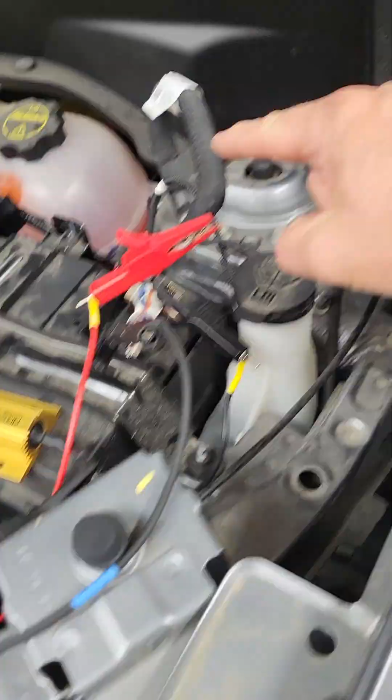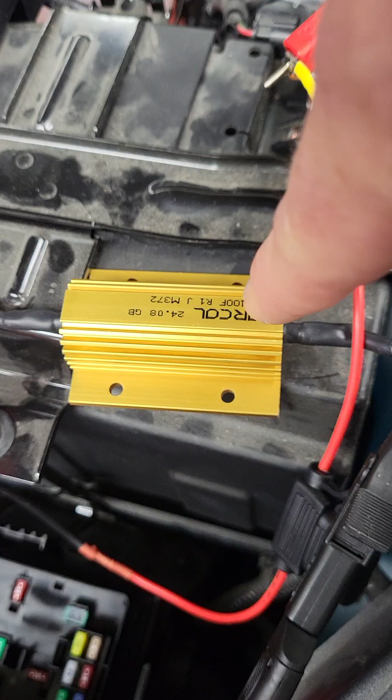So we disconnected the main negative to the battery, and from that went through an inline fuse, and then we go through a 0.1 ohm shunt, and then that carries on back to the ground. So that becomes our ground path, literally just going through a 0.1 ohm shunt.

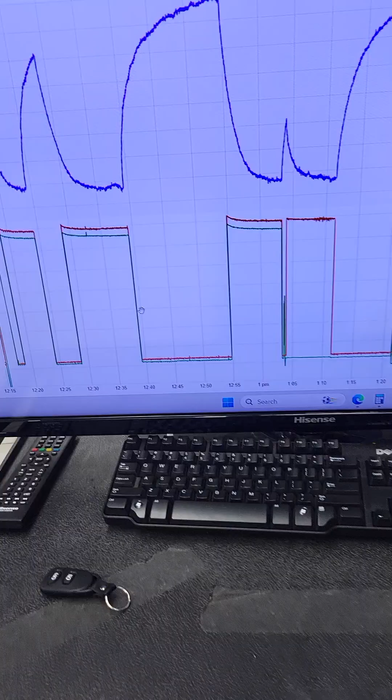We connect the Pico up to that on one of the channels, the red channel there. It's doing a voltage drop over the shunt, and then the Pico's doing a calculation, changing that into current through an equation. So the red one is measuring current, but it's actually measuring a voltage drop over the shunt.

This gives 100% confidence when there is a draw or when there isn't a draw coming from the vehicle. And it's something that will never power down like a meter. So a meter is a shunt as well, and this is just a shunt that will never power down. We can keep it going.

Then channel A, the one up top there, is just simply monitoring battery voltage. And this is telling us lots of good information too.

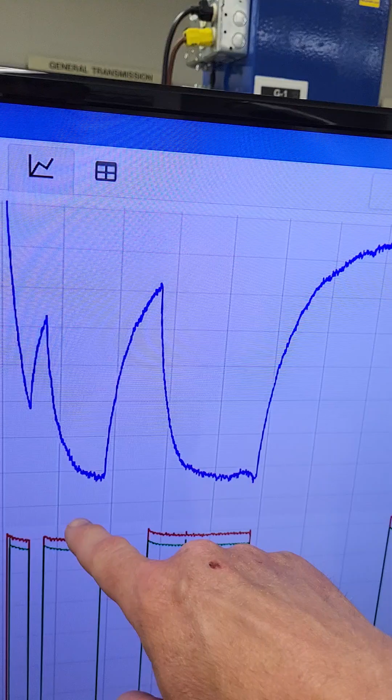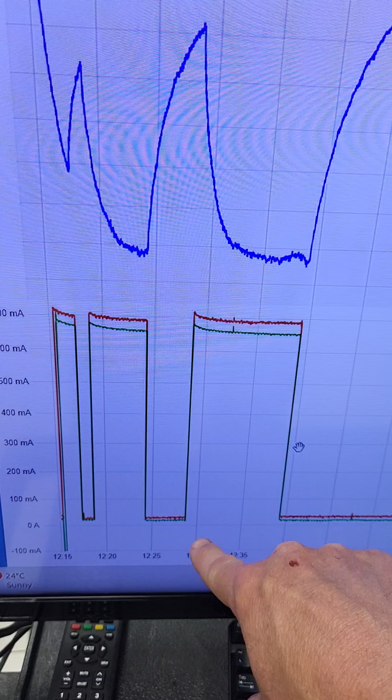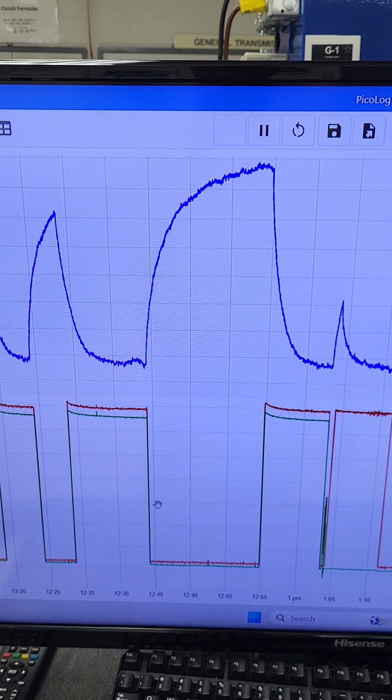As the parasitic drain turns on, you see the battery voltage slowly drops down, parasitic drain turns off, current draw decreases, and then you see the battery takes its time recovering back up to where it should be. So the fact that it recovers every time and quite actively tells me the battery's pretty good, right? The battery is able to chemically recover once the draw has taken place.

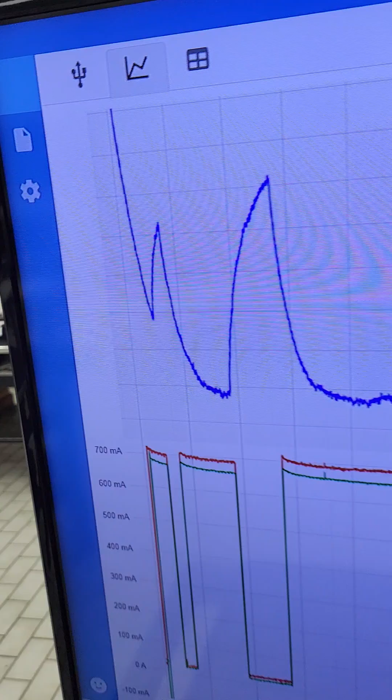Keep in mind, this is all living between 12.72 and 12.8. So we're talking very small voltage changes here throughout this. And we've got about 600 milliamp draw coming on for the parasitic drain.

Now with that, the green line is simply the Pico amp clamp. And the process here is when you have the battery distribution like that, you end up plugging in the tools, all three circuits: your battery voltage, your shunt current, and then your actual measured current through the current clamp. The current clamp and the shunt are on the same line during this period.

And through that, we verified that we do have an intermittent parasitic drain. Then what you do is you take the current clamp off the shunt line, and I put it on the very first battery connection here for the main power supply, and then we watched it, and you wait.

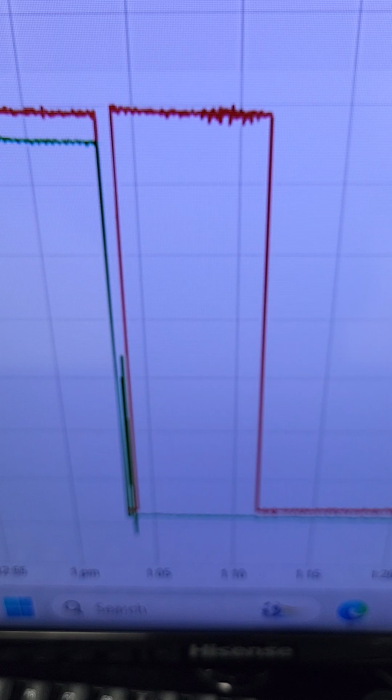And so you could see that little squiggly in between. That was me disconnecting and reconnecting that amp clamp. And then you see here at the bottom, the amp clamp never showed any current, which means this line here did not have any current going through it when the failure took place.

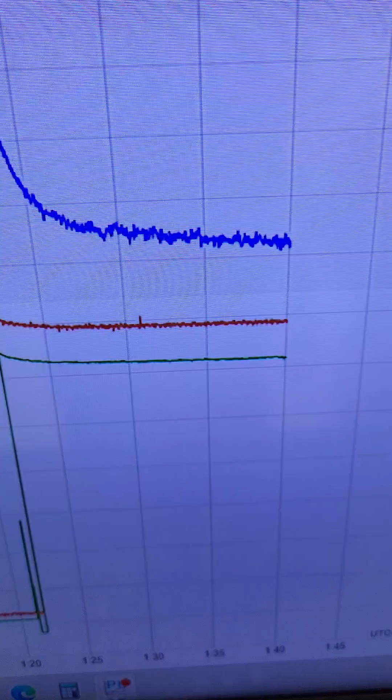So then we disconnect the amp clamp and we move it to the next one over. And with the next one over, you see that was the movement of me moving the clamp there. And then you see once the failure took place, the amp clamp is now registering current again. So this tells me that your intermittent parasitic drain is coming from that.

So now you'd have to go to power distribution and just see what is supplied on that line, and then start doing your parasitic drain at that fuse block.